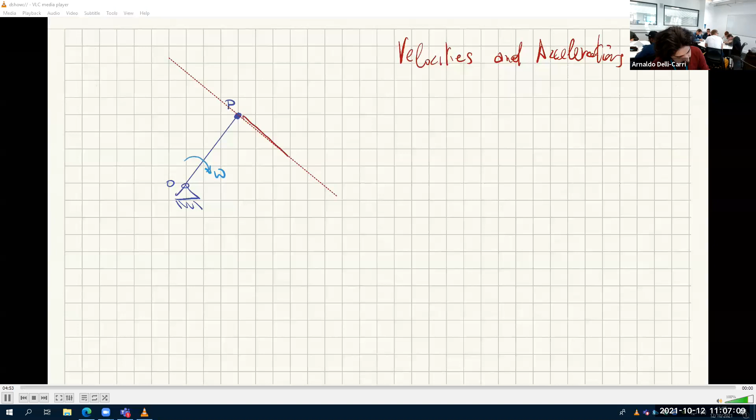So at the next instant of time, let's say this time here, I'm expecting that P has moved along this arc of circle. All right, so now the instantaneous velocity of P is tangent to the circle. The circle is the trajectory that point will take. The velocity is always tangent to the trajectory.

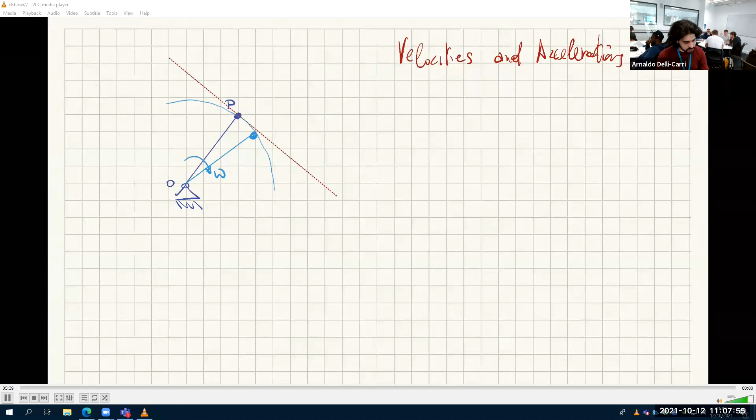Why? Because ideally what you have to do is, remember, this is the position vector RPO at this instant of time. This is the position vector RP prime O, where this is P prime, at the next instant of time. We don't know when, we say next instant of time.

So what is the velocity? What is the definition of velocity? Displacement by time, displacement in time. So what do you mean, the displacement in time? How much displacement and how much time? Well, the displacement is d theta times r.

So what you want to say is that the velocity is basically the difference between the two positions. Final position minus initial position divided by the time interval. These are vectors, so let's call these vectors, divided by the time interval, delta t.

Agreed? Now, what happens? Well, let's say that this delta t is just a number, so it's a scalar. It will not affect the direction of the vector, it will just make it longer or shorter. Agreed? So if we look at this difference, how do you take this vector minus this vector?

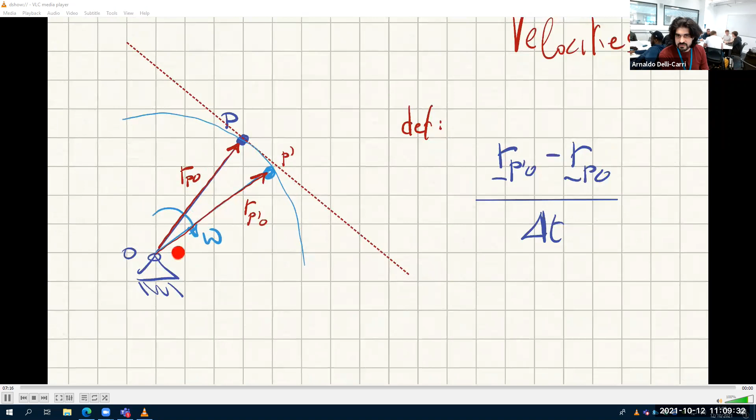This minus this, you have two vectors. So the difference between two vectors is this. Do you agree with me? This is the velocity. This thing is RP prime O minus RPO. Why? Because if I do RPO plus this, it gets me RP prime O. So this plus this gives me this, so this minus this is this.

Agreed? Guys, raise your hand now if you don't understand, because this is fundamental.

Okay, what happens now? This is an average velocity over this interval of time. That's the idea. What we want is to find the instantaneous velocity. Instantaneous velocity means when this delta t tends to 0. So if we take this over the limit for delta t going to 0, what do we get?

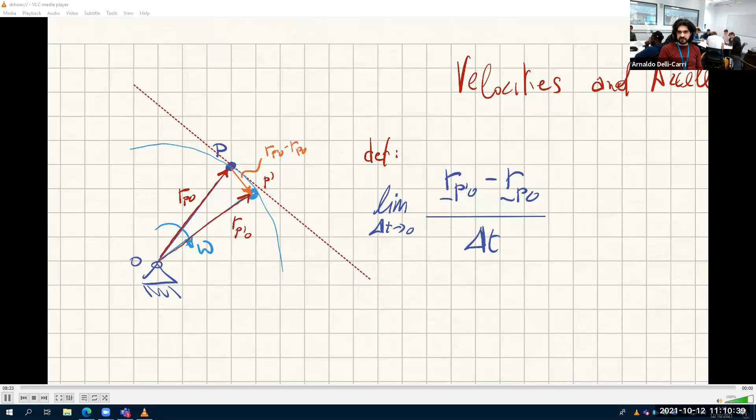Well, this is exactly the definition of derivative, agreed? This is dr over dt. That's the idea, and this is the derivative of a vector, dr in dt, and this is v, which we can also say, if you look at this, this is d theta.

So we can say that this arc here, this tiny thing, well first of all, when we make delta t equal to 0, that means we are using a closer and closer vector. We are going narrower and narrower until we reach the point where this vector here becomes this vector here, which is tangent, as I was saying.

This one is the actual velocity of P. So you see, if you take a finite interval of time, it's not tangent, it's slightly off. So it's tangent only if you take the derivative, which is the instantaneous velocity. That's what we are talking about.

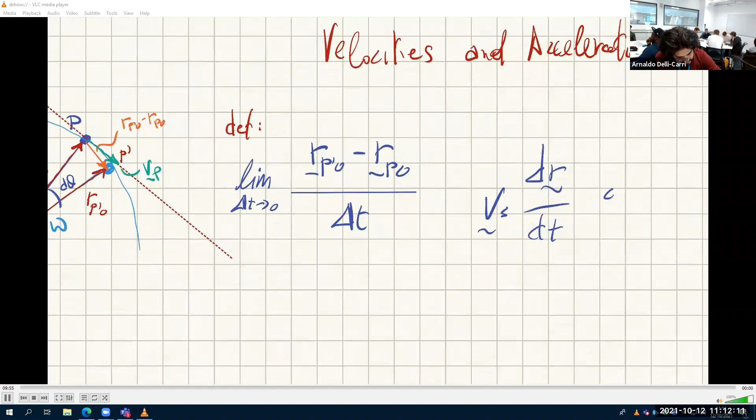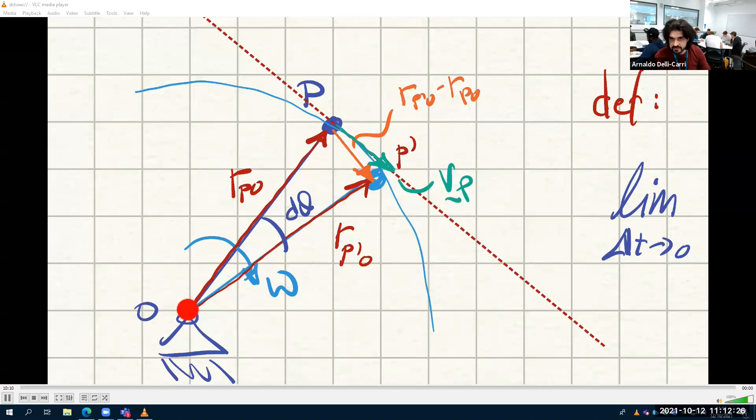And this, geometrically, this thing is just d theta times r divided by dt. Do you agree with me? Because this is d theta, so this arc here is d theta times r. Agreed? So d theta times r divided by dt.

And that means this is also equal to omega r. Because remember, what is omega? Omega is just d theta in dt. So I call this omega, and so I get that the velocity of point P is omega cross r. Why do I use a cross?

What is the cross product of two vectors? It's another vector—a third vector that is perpendicular to both vectors and has direction given by your right-hand rule.

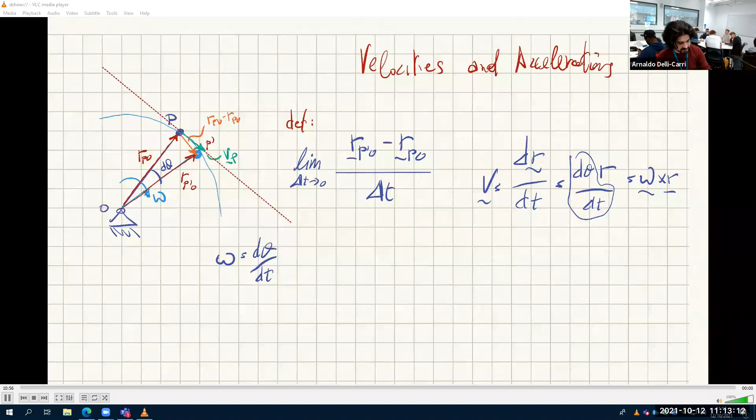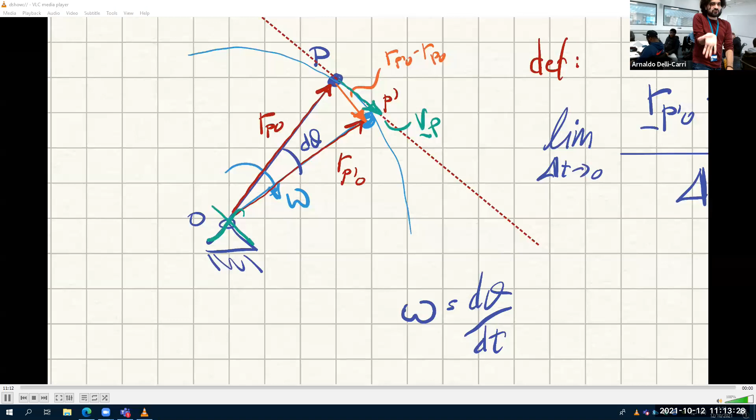So if I take omega, which is this vector here that goes inside the paper, omega is a vector that goes inside the screen as I've drawn it. Omega goes inside, and then I have to place my hand like this. You have omega inside, and then you have to put it onto r. Put inside onto r, and you get this. And this is exactly the velocity of P.

Agreed? Let me do this on the screen as well. I'm going to remove myself from the camera for a little bit to show the same thing. So what you have is that omega is inside, cross r gives me this, and this is exactly VP. That's how you do it. I'm back.

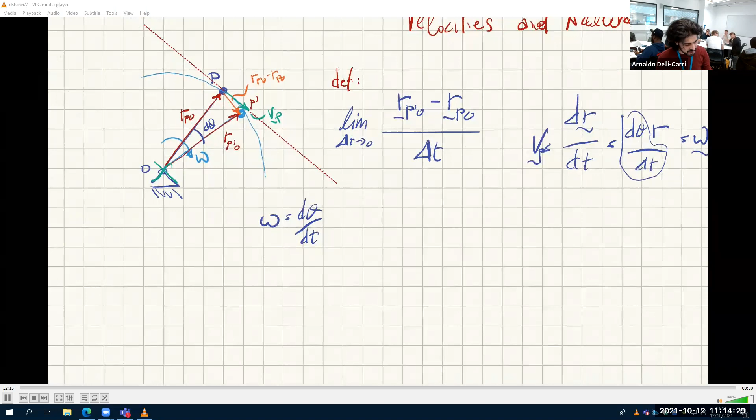Okay, so now that we know these things, we found everything. This is the velocity of P with respect to a fixed point O. Agreed? What happens if O is moving? Well, if O is moving, we have to add the velocity of O to whatever is the velocity of P with respect to O. Because if O is going somewhere, P is following along the link and it's rotating around it.

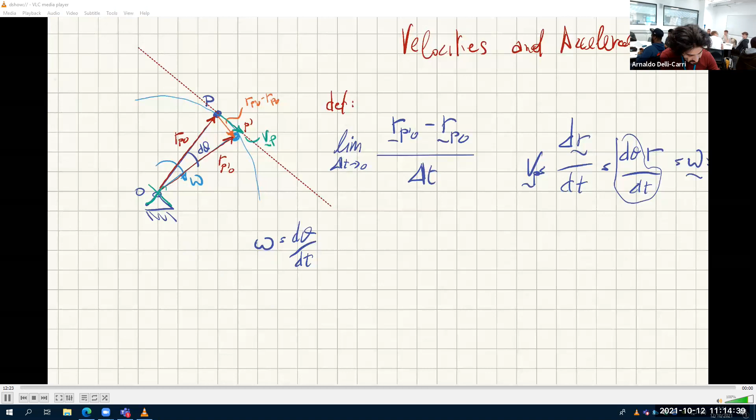So the velocity of P—guys, this is the formula that you need. The velocity of any point is equal to the velocity of a reference point plus omega cross vector r PO. This is what you have to remember. This is the holy grail of the velocity diagrams. Use this every time to get all the velocity diagrams in your life, just with this simple formula.

Can you please repeat that red equation? So this red equation here is: the velocity of P is the velocity of O, so whatever O is doing, plus whatever P is doing around O. Imagine this here, we also call it VPO, which is the velocity of P with respect to O. And so we can also say that VPO is VP minus VO, because this is exactly the definition of relative velocity.

Remember what was relative velocity? It's the velocity of a point minus the velocity of a reference point. That's what it is. And so what I'm saying here is that the absolute velocity of P is equal to the velocity of a reference point plus the velocity of P with respect to that reference point.

Now, if the reference point is fixed, this is 0, and then we go back here. What I'm saying is that P is this point here on the link, and O is the fixed point on the link, or reference point. This is all you need.

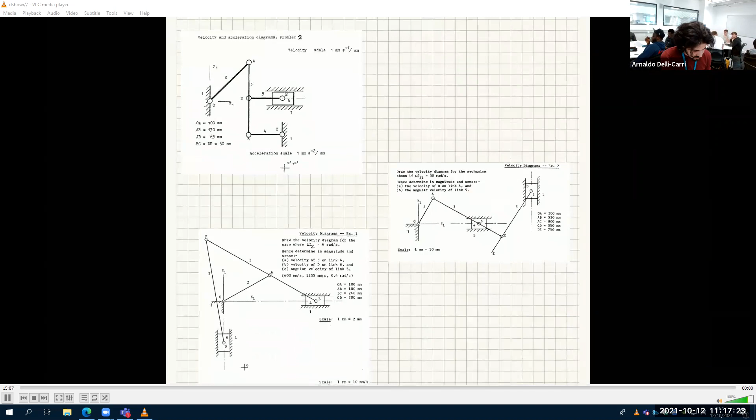Okay, so let's solve this one. Let's solve which one? This one. I'm not sure which one—we have 4, but let's solve this one because for the first one, we don't do the velocity or acceleration diagrams afterwards. I want to solve this one because we also do the acceleration diagram later. And then I'm going to solve this, and if there's time, I'll solve this one first—this one and this one.

Okay, let's start. This is a mechanism of which we know complete geometric information. We know the geometry of this thing, although it doesn't look like it's to scale. So this is 100 millimeters, however much this is, and you can find the length of all these. So you have complete geometric information. You can't find the velocity diagram's actual values if you don't have complete geometric information—you can see the shape, but you can't find the actual values.

We also have that point O and point D are fixed to the ground, and this structure is pinned onto them. So body 1 is the ground, as we love to say—1 is always the ground. Body 2 is this OA, link OA. Then body 3 is, of course, this entire triangle—say it's a plate.

And then we have link 4, which is link BD. All right? Does it make sense?

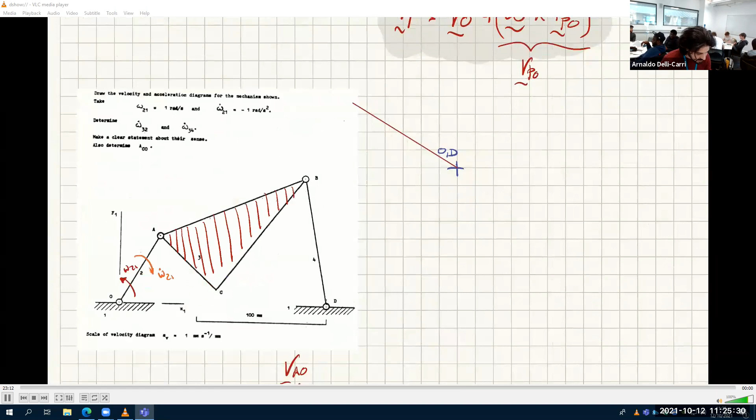Let's say that this is 100 millimeters. This looks like 80, something like this. Yeah, looks like 80, more or less. How do you measure this material? You measure it, because it's to scale. Now, I'm not measuring it, but I'm saying that this is 80 millimeters.

So if this is 80, this vector here, this is 1 radian per second, this is 80 millimeters, and so the velocity of A is just equal to 80 millimeters per second. Agreed? Which direction? Perpendicular to both this and this, so that means it's in this direction. Now you draw an 80 millimeter long vector. Let's say the scale factor is 1 millimeter is 1 millimeter per second, so you draw an 80 millimeter vector in this direction, and you say that this is VA.

VAO. And so if this is VA, this is point A. I'm calling this VA because VAO is also equal to VA, because O is fixed.

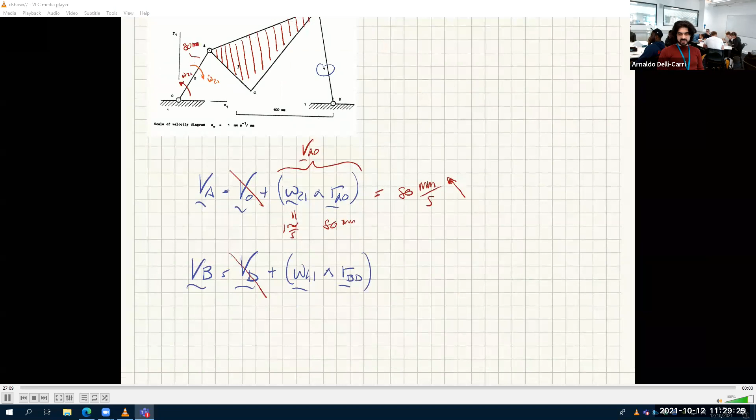Now, what do we know about VD? Well, VD is fixed, VD is 0, because we start from here, this is D. So this is a very good choice of reference. And what else do we know? Do we know RBD? Yes, RBD is given, well, let's say this is 100 millimeters because I measured it. So we know that this is 100 millimeters.

Do we know omega 41? No, we don't. So are we stuck? No, we can just create an infinite line and draw it. So the only thing that we don't know is the length, what we do know is its direction. We don't know how long the vector is, but we know it must be perpendicular to this one and this one.

Now, this one, it's either pointing out of the paper or into the paper, so we don't care, because that means the resulting vector is in the paper. So this only tells us the resulting vector is inside the plane, so we can draw it, we don't need a 3D thing. The important information here is that this thing is perpendicular to RBD, and that's the only thing we know. We know it's perpendicular, and that's it.

So we start from D, because this is our reference point, so we start from this point here. And we say that, let me also remove all these things. We start from D, and we say that, okay, let's take this as my perpendicular vector, let's make it as perpendicular as we can. So this is the direction.

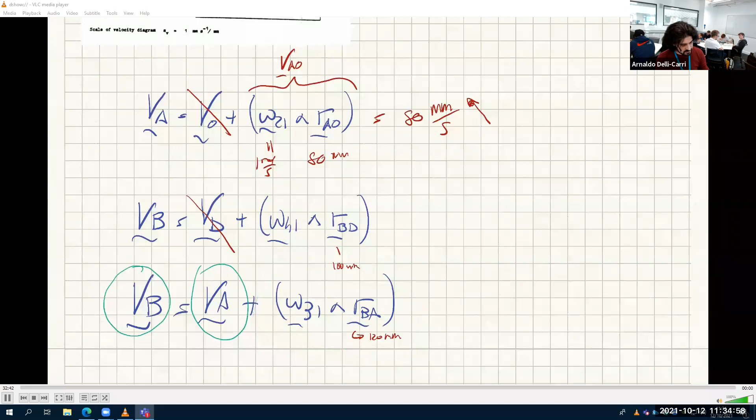Let me show you. So first of all, let me call this B line with respect to A, because VB is VA plus this vector here. And so VB is VA plus this vector here. See what I'm doing? And VB, so the same vector, is also VD plus this vector here. So VD is 0 plus this vector here. Okay? See what I'm going?

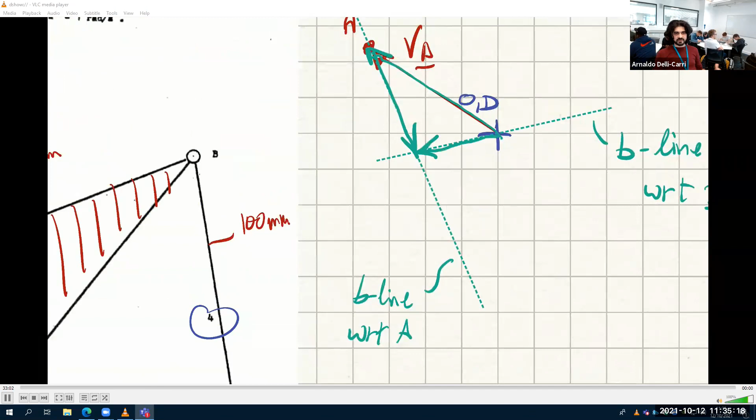I'm going to B. This point must be B. And so I can say that this vector here, I call VBA, velocity of B with respect to A. And this vector here, I call it velocity of B, which is also the velocity of B with respect to D. You agree with me? Because VD is 0, so VB is VBD.

Can you show you got the B line with respect to D again? Of course.

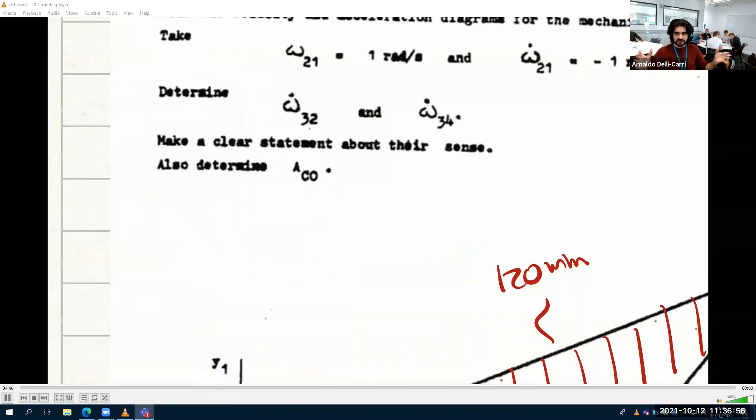Why omega 3.1 and not omega 3.2? So first of all, omega 3.1 means how the body, this plate 3, is moving, is rotating in plane with respect to the ground. So it's the absolute angular velocity of 3, so it's always 3.1. You also call it just omega 3. Everything that has a 1 attached at the end means absolute. It's just a way to make sure that we are on the same page, because, see, omega 3.2 is omega 3 minus omega 2, exactly as VBA is VB minus VA. All right? Omega 3.1 is omega 3 minus omega 1, but omega 1 is always 0 because it's fixed. It's the omega of the ground. So that's what it is.

Okay, so this looks horrible because it's tiny. You can make a much better job than me, okay? And also to scale. But yeah, so that's it.

We found VA, VB. Do we need C? Yeah, let's do C. I mean, I don't think we need C, because once you know what A is doing and B is doing, well, C is very easy. But again, for the sake of completeness, let's find VC.

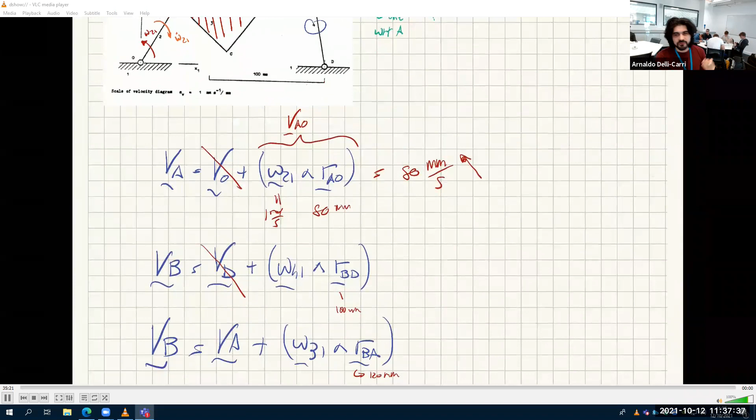How do you find VC? You choose a reference point. Which reference point? Well, we now know VA and VB. VA is the absolute velocity of A, VB is the absolute velocity of B. And both points are also connected to C.

So I take the first equation with respect to B and the second equation with respect to A, and I find what's happening to C. So I find a C line with respect to A, a C line with respect to B, where they intersect, that's point C.

And then we check. So I'll go here and say VC is VA plus which omega? Which omega? Omega what? 3.1, because we are still on body 3. Okay.

So what is this? Well, this is VA, so that means I start from VA and I draw a line, this line, so this is V, let me call this with this name. This one is also called VBD, V of B with respect to D. This one is also called VBA. So this one is called VCA.

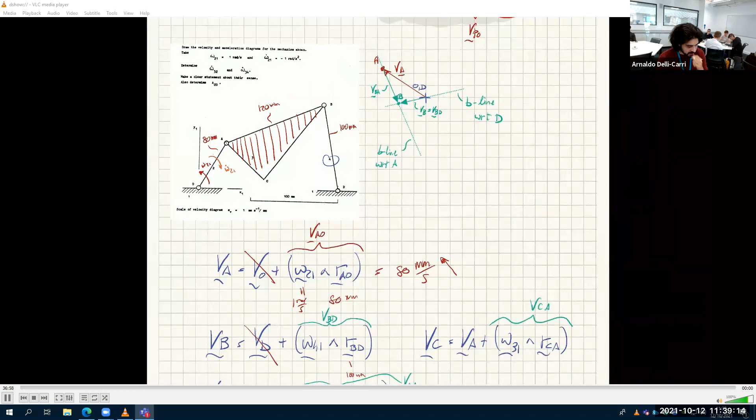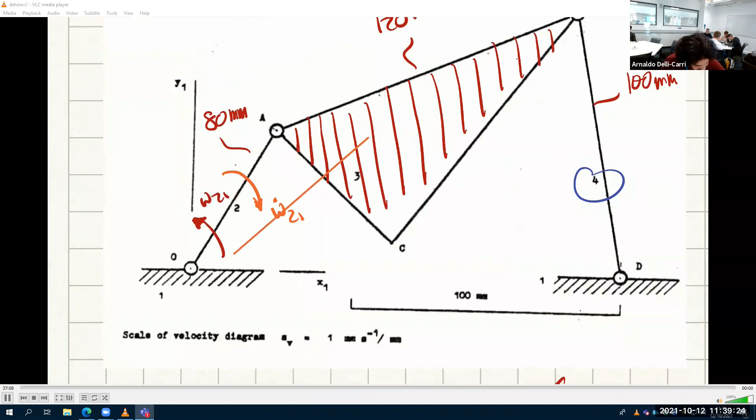So velocity of C with respect to A. That means I must start from A, I start drawing it from VA. So I start from VA, and let's do it this orange now. And I draw a line that is perpendicular to CA. Perpendicular to CA is this one, as perpendicular as I can make it. And I must attach it to here, to A, point A. And this is my C line with respect to A.

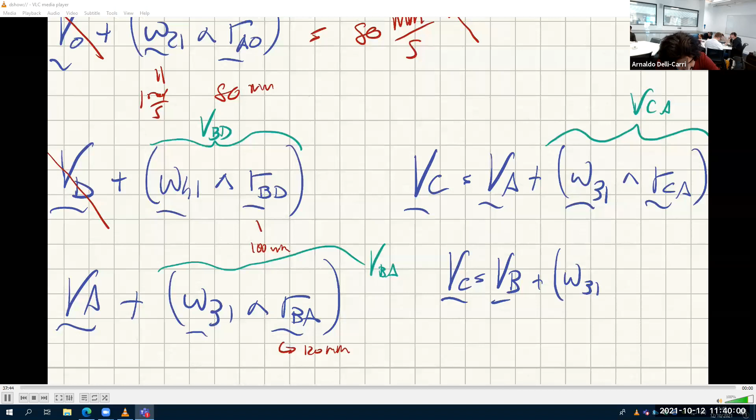Now I do a line with respect to B, but I have to draw the other equation first. VC is also equal to VB plus still omega 3.1, because that's the same body. They are on RCB. And so this is also called VCB.

And we know that this vector here is perpendicular to RCB. So RCB is this, so perpendicular to this is this vector, this direction here, as perpendicular as I can make it, must pass through B, because I start from B. This is VCB, VC with respect to B. So I start from B, and this is my C line.

With respect to B. And where do they intersect? The C line is called the C line because C must lie on that line. But we have two C lines, so C must lie at the same time on both lines. So that means it can only lie here. So this is point C. And so that means that this vector is VCA, this one. This one is VCA. This one, see, that's getting very messy, sorry. This one is VCB.

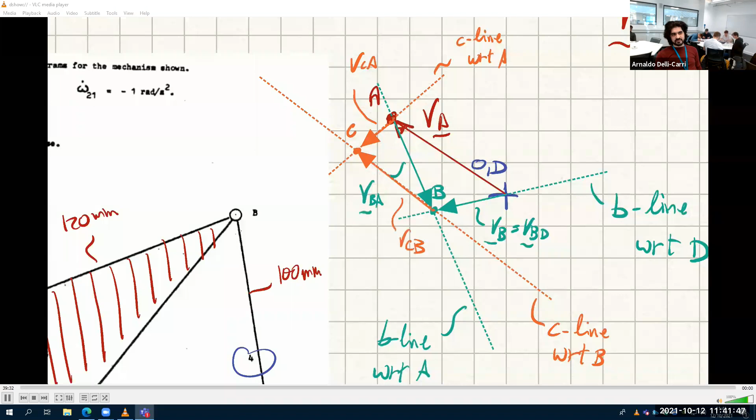But the vector itself, I have not drawn yet. The vector I need is this one. Agreed? Because that's the sum, that's the sum of those two. So this one is VC. Okay, I mean, it's horrible, I give you that, but we can make it larger. I can just scale it up very easily. Still looks horrible, but larger.

Good? Any questions? No? I mean, it's not hard. It's just always the same thing, literally always the same thing. You just have to make sure what's going on and how you solve these things.

Sir, yes? How do you find the directions? The direction comes from here. See, it's always perpendicular to—this means in plane, means in the paper, and perpendicular to this. So this is what gives you the direction. Once you know BC, is this, you know that VCB is just perpendicular to this. Okay, so VCA is perpendicular to AC, and that's so on and so forth. They're always perpendicular because that's how the definition works.

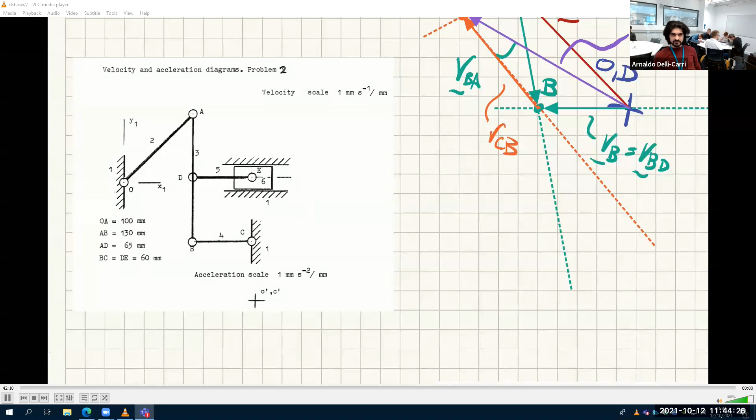All right, you don't have any questions, but I want to show you, before I give you a well-deserved break, how do you treat these kind of problems. Because look at this, here we have a sleeve, say, and a piston in a sleeve. So how do you do about that? So let's do the velocity diagram of this other thing.

So you can do these by yourselves, because then we have to do the acceleration diagrams now. So let's do the acceleration diagram of this. We take this down.

We have all the information here, okay? These are all given. So now this is much better. And we want to find what happens to 2, 3, 4, and 5, and A, B, C, D, E.

One thing I didn't tell you is now that we have these vectors, we can find all the omegas. You remember the omegas were all unknown. Now that we have VCB, we know that VCB is omega 3 times RCB. This we can measure here. This we have measured earlier, so we can find omega 3,1.

So you can say that omega 3,1 is VCB divided by RCB. Agreed? And omega 4,1 is here, look. So it's VBD divided by RBD. And of course, I'm saying these because these are the magnitudes of these two vectors. The magnitude of VBD divided by the magnitude of RBD.

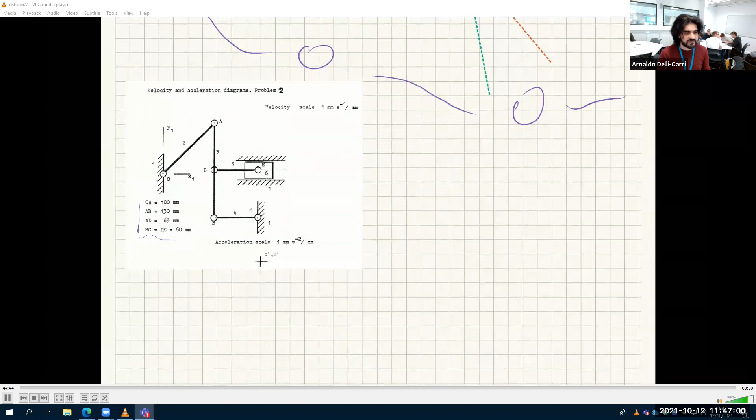Okay, let's do this very briefly. So what is the velocity of A? Let's say that omega 2,1 is given. I don't know which one is given here, but let's say omega 2,1 is given, and let's say it's going in this direction. So what's the velocity of A?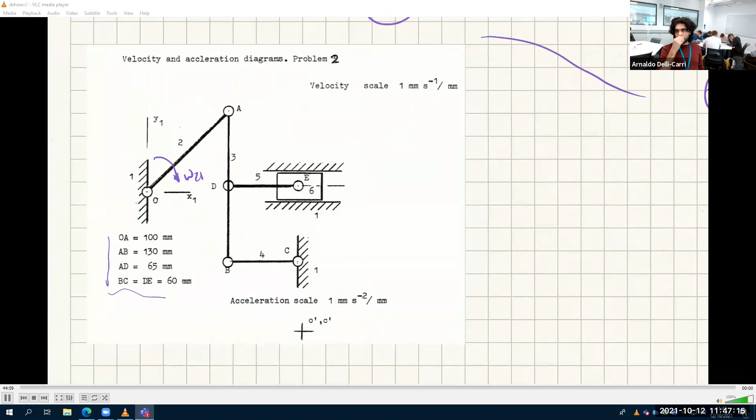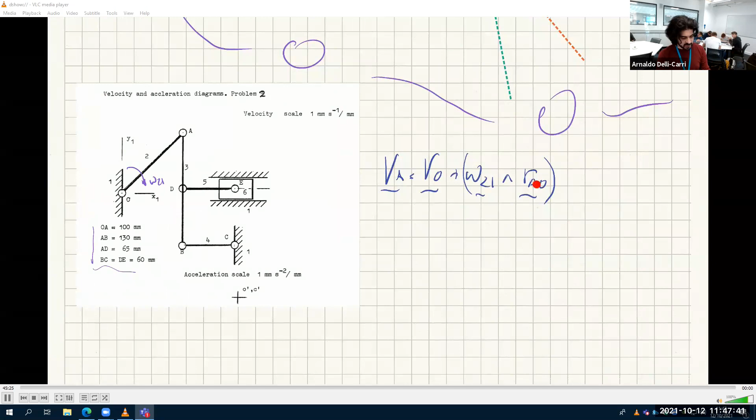The velocity of A is the velocity of O plus omega 2,1 vector RAO. Always this. Always, always, always this. Velocity of O is 0. And that means the velocity of A must be perpendicular to AO. So that means it's in this direction. Okay, this is VAO, which is also VA.

How long is it? I don't know. So let's find out, because we know that omega 2,1, let's say, is 1 radian per second, and RAO is 100 millimeters. It says here, but this is 100 millimeters, so the velocity is 100 millimeters per second. Agreed? So we can draw a vector that is 100 millimeters long. This is 10 centimeters, probably too large, so I would use a different scale factor. And it's in this direction.

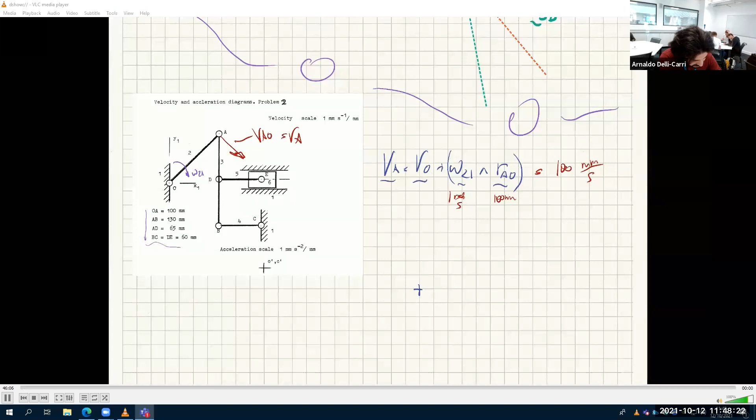So let's say I'll start from this point. And this point is O and C, because O is fixed and C is fixed. And then I draw this one, which I'm saying is perpendicular to this. And this is point A, and this is VAO, which is also VA. All right, that's it. Very easy.

Let me check the chat. Yeah, Ravi, it's given. It's given. It should be given. You need at least one velocity, otherwise you can't solve it. This is a mechanism. Mechanisms are 1 degree of freedom. 1 degree of freedom means that when you set a velocity, you know every other velocity. When you set a coordinate, you know all the other coordinates. Okay, I'm saying omega 2,1 is equal to 1. It doesn't say so, but probably because I just cut out. That's at the top, right? Velocity. No, that's the velocity scale, the velocity scale diagram. It's the suggested scale for the velocity diagram. Okay, so yeah, unfortunately, we don't know that, but it doesn't matter.

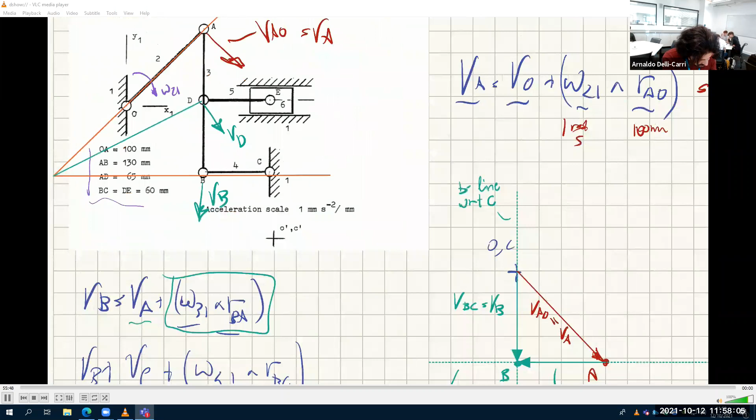Okay, so let's find VD. Again, we said that VA and VB are not useful, but what we can say is that VD will be half as much as VB. It must be. So let me get rid of these, otherwise it's confusing. So we know that VD must be half as much as VB.

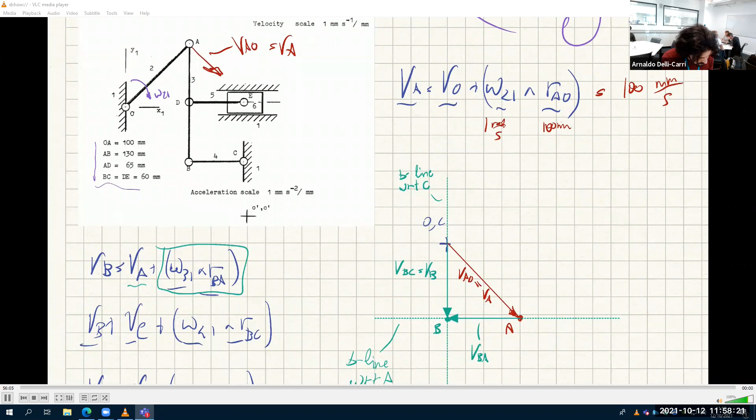We use A and B, but we can also use A and C. We see, sorry—no, we can't use VC because otherwise we don't have one of these.

Okay, so we just have to say that since VAB is this, VBA is this, that means VDA is half of this. VBA is this—imagine that this is the point of rotation of A. B moves in this direction with respect to A only, and that means D must move in this direction because they must lie on the same line. So if VB is 10, VD is 5, because it's halfway through. It's linear, that's the idea.

So what we want to do is take VBA and say that D lies here. Sorry, VDA is this point here—this vector, exactly half as much, is VDA. And so how much is VD? Well, VD is just VDA plus... so this is VDA.

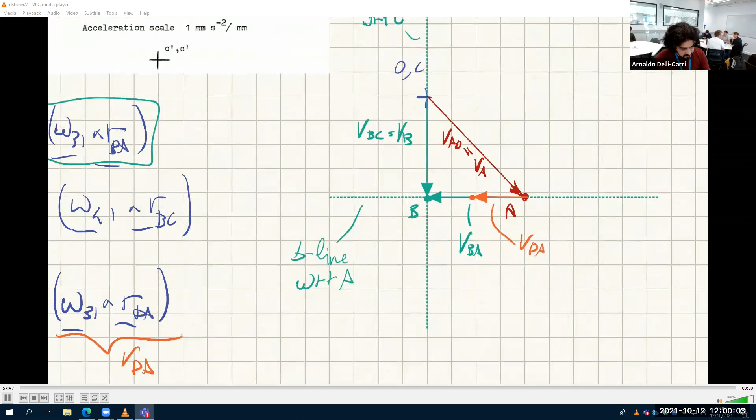So VD is VA plus VDA, and that means VD is this vector. This is getting messier, of course. There you go, this one is VD, which is VA plus VDA. Now that we found VD, this point is D. Let me get rid of this and put it here. This point is also point D.

We can now go and find E. E is, of course, horizontal. That's one thing we know for sure: E must lie on this line with respect to O. With respect to O means with respect to the fixed point, the ground—this E moves horizontally. So this is the E line with respect to O, which is with respect to the ground.

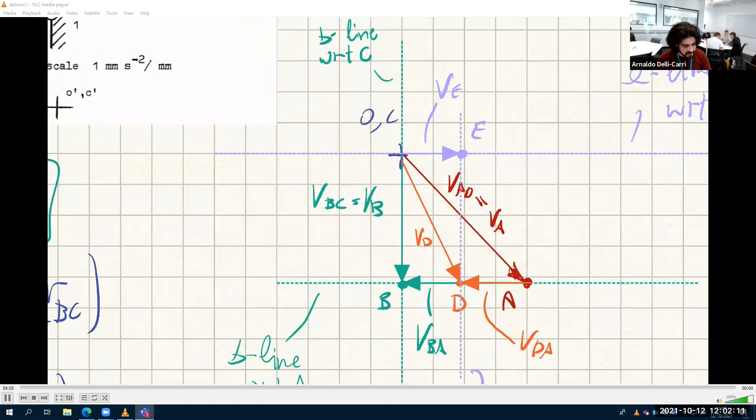We know that given VD, D and E relate by the equation VE is VD plus omega 5,1 vector RED. That means this is perpendicular to RED, so I start from D and draw a perpendicular line, which is a vertical line passing through D. And this is also the E line, but with respect to D. That means point E is this one, and this is VE. This one here, which I won't draw, is VED.

That's it. It might be a lot to take in, but it's always easy unless 3 points are aligned, because then the reference system points doesn't really work, and you have to understand the ratio. If they're aligned with this exactly in the middle, whatever velocity you have here, half as much you have there. But if this was say 2/3 of the way, then this would be 2/3 of the speed. It's just a very particular case. I don't think it will come up at the exam, because we tend to make exams solvable in an easy way. Don't be scared though—when 3 points are aligned, it's always like that, it can't be any different.

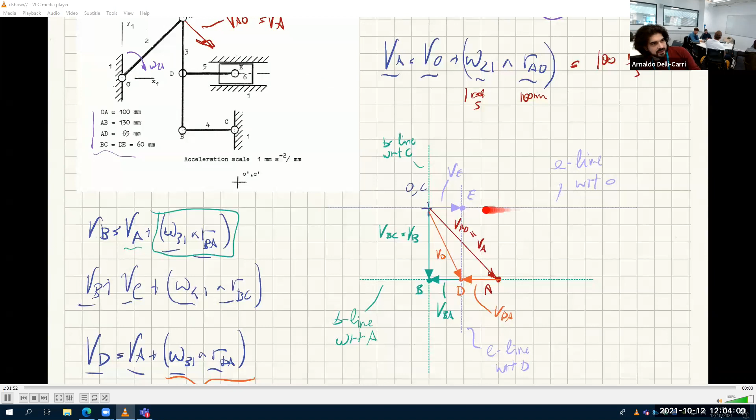So how do we find VE? Well, we know that point E, with respect to the ground, can only go horizontally, because it's constrained to move horizontally. So with respect to O, which is the ground because it doesn't move, this is a horizontal line. Then with respect to D, VE can also be written as an equation: VE equals VD, so I start from this point, because this is point D, plus this vector here, which is exactly a vector perpendicular to ED. Perpendicular to ED means vertical. So the vertical line passing through D intersects the horizontal line passing through O, and this is point E.

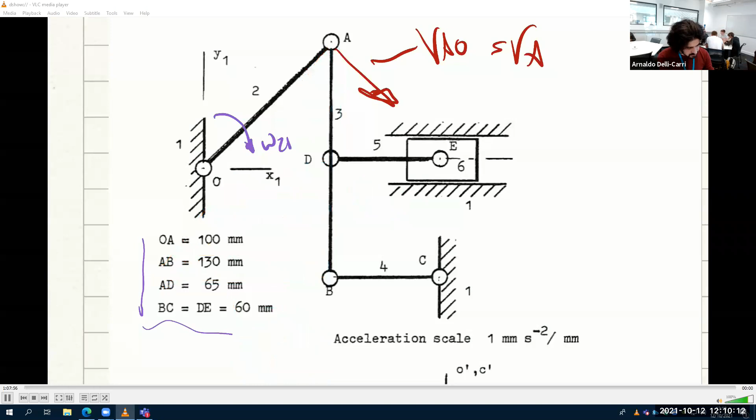And this one here, which is VDA, since this is 130 and this is 65, that means VDA is half as much as VBA. Agreed? And so that also means I can go here and say that on VBA, VDA is just the same vector, but scaled down by a half.

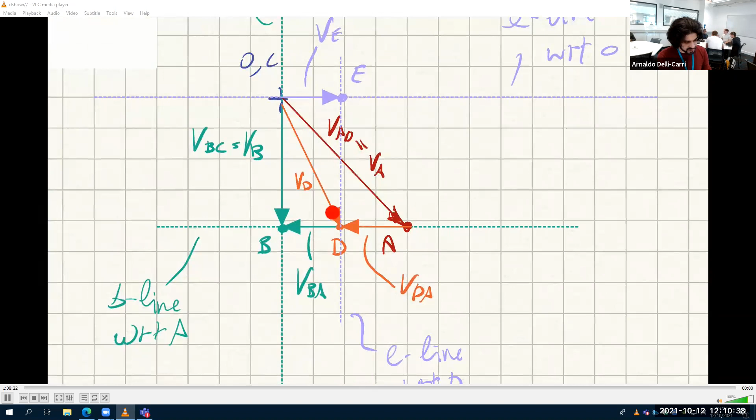And so that means now if I look at the equation, VD is VA plus VDA. So VD, this vector here, is equal to this vector plus this vector. So I find VD. Okay? Let me check the chart. Is this clear?

Why does VD start from O and C? Because VD is the absolute velocity of point D with respect to the ground. The grounded points are O and C, these are ground. So everything that starts from here is an absolute velocity. In fact, you have VB going from O to B, you get VB. From O to A, you get VA. From O to D, you get VD.

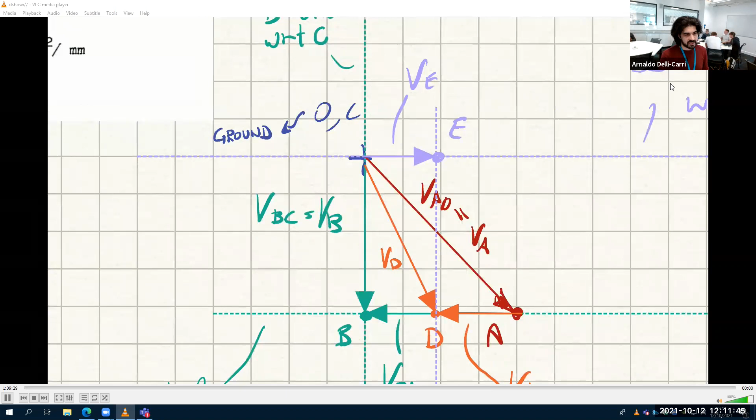It's the zero point because they are both fixed. O and C are both points that are fixed to 1, fixed to the ground. Is this clear?

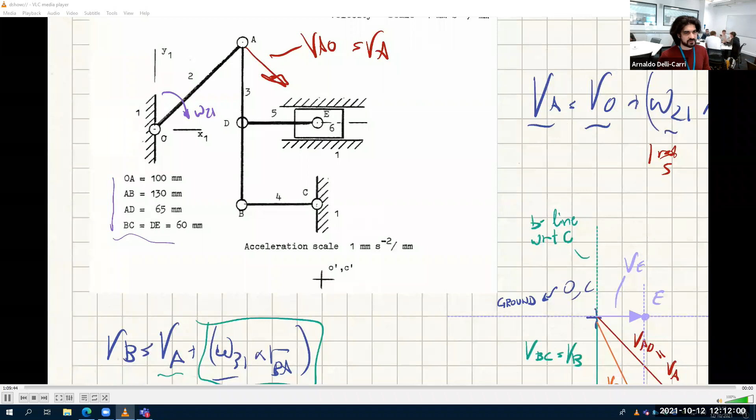What do you mean by omega 21? I just said it's 1. No, this should be given.

What do you mean it's not parallel? Not parallel to what? What is not parallel? Which vector is not parallel to the picture?

VD, but it must not be parallel. VA is this, VD is more inclined, and VB is vertical. So this is VA, this is VD, this is VB. So if I draw this link at the next instant of time, okay. Agreed?

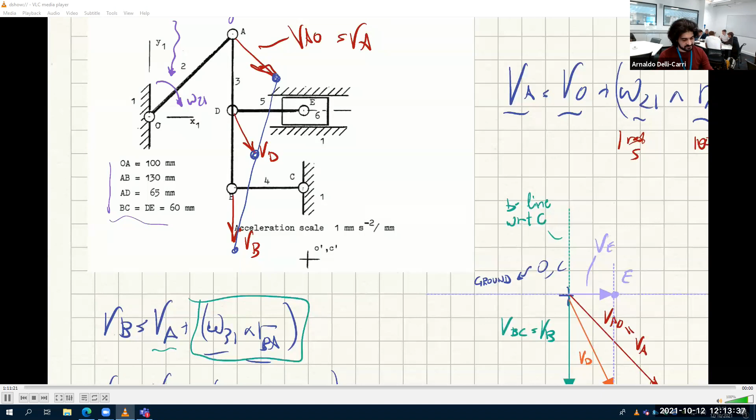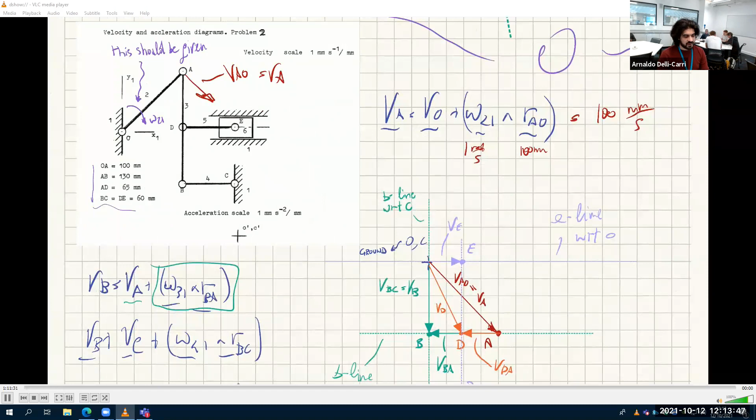Okay, let's resume very briefly. Let's do accelerations.

How do we find the acceleration? What is acceleration? It's the derivative of the velocity. Agreed? So let's remember what was the velocity: velocity of P is the velocity of O plus omega vector RPO.

Okay, looks easy enough. So if I take the derivative of VP, the acceleration of P is equal to the derivative of the velocity of P with respect to time. And so this means the derivative of the velocity of O with respect to time, plus the derivative of this, with respect to time. Okay, agreed?

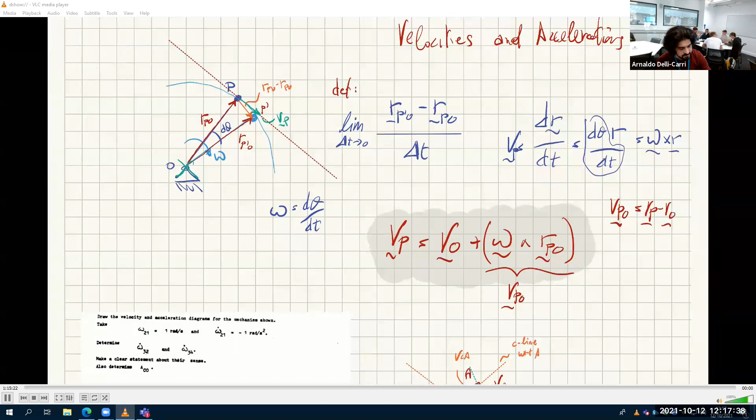Zero? Why zero? No, it's R, that's the velocity of P. Oh, that's the derivative of the displacement, RPO. RPO is the position vector, the derivative of the position is the speed. Agreed? So remember RPO, we did this all the way back, the derivative of R in t is omega times R. So if you look here, this is also omega times R.

And lo and behold, this is the final formula. As you can see, we don't have 2 terms now, we have 3 terms for acceleration. 3 terms.

How do we make sense of what's going on here? Well, here, this is easy. Let's rewrite this in this way. Acceleration of P equals acceleration of O plus this term first, omega cross omega cross RPO, plus omega dot cross RPO.

Now this term is what we call tangential acceleration, acceleration tangential P. And this one is what we call normal acceleration or centripetal acceleration, acceleration normal P.

How do I know that these are tangential and normal? Well, let's look at their direction. We know that this is a cross product between a vector that is perpendicular to the board, and that means the resulting vector ATP is a vector inside the plane, and it's also perpendicular to RPO. So perpendicular to RPO means that AT is this.

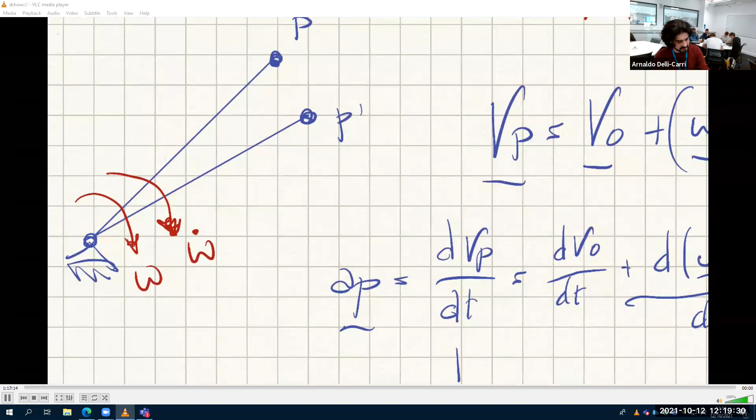Let me get rid of this. AT of P is this vector. It must be perpendicular to PO. Agreed? This is PO. It must be perpendicular.

And it follows, it doesn't follow omega, it follows omega dot. So if omega dot is in this direction, then ATP is in this direction. If omega dot was in the other direction, ATP would be in this direction. So the ruling factor, the king here is omega dot in this term: angular acceleration, radians per second squared.

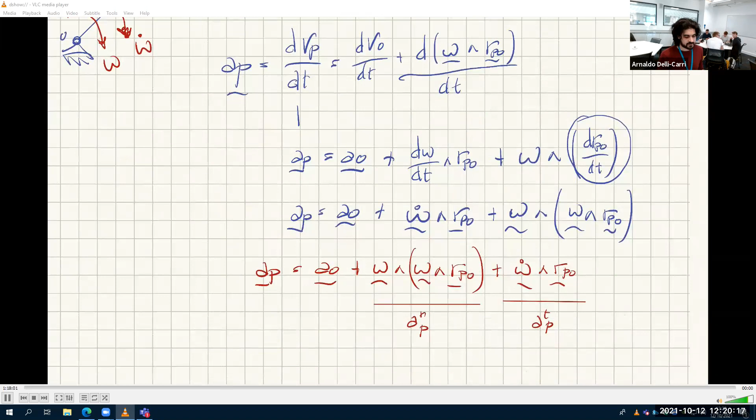What about this? What's the direction of this? Well, this is a double cross product. That means perpendicular to the perpendicular. What is perpendicular to the perpendicular? It's just parallel with extra steps. Okay, that's what it is.

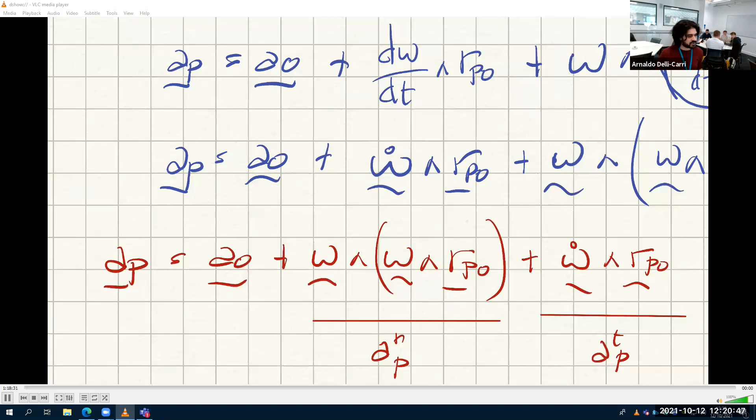It's parallel, but it's not as parallel. Well, it is parallel, of course, the same direction, but it's in the opposite direction. Why? Because let's have a look. These are my two vectors. This is my original RPO.

The first cross product gives me this, and the second cross product gives me this. So perpendicular, perpendicular again. So it's parallel, but in the opposite direction. Agreed? Very important. So it's not in the same direction as RPO, it's in the opposite direction. It's ROP.

And that means that it's called centripetal acceleration because it's in this direction. Agreed? So it doesn't go that way, because it goes the other way. Acceleration normal P. Okay, that's it.

That's it. What is the acceleration of P? It's the sum of these two. Well, of these three, because if you also have an acceleration of O, you must also sum the acceleration of O. So the acceleration of P with respect to O is this one, this one, APO. Agreed? Just two components of the same vector.

Let's call this APO. So AP is just AO plus APO. It's the same thing. The relative acceleration is AP minus AO. That's what I'm saying. But AP minus AO has a full story inside it.

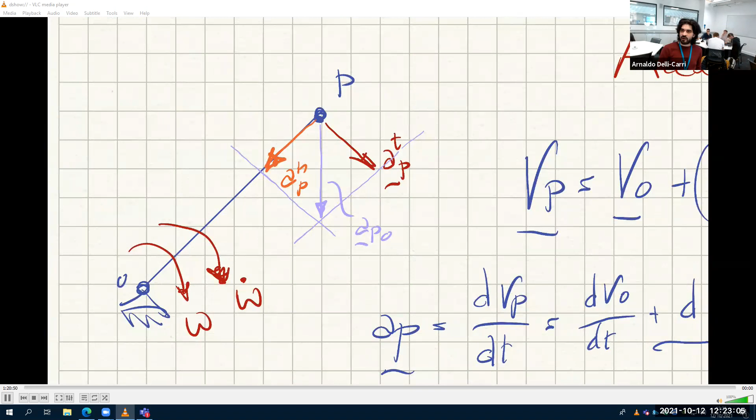What happens if you're going at constant angular speed? That means you have no angular acceleration. What happens if you have no angular acceleration? This thing that depends on omega dot disappears. So the acceleration of P is just the normal acceleration of P. This goes away, but this does not go away. This depends on omega, not omega dot. That's why I was saying the velocity diagram is required for the acceleration diagram. Otherwise, you lose all this information here.

Do you remember when we said that in first year, the normal acceleration is omega squared r? So omega squared r, see, there you go. Now you have a vector representation of that thing. In fact, the magnitude of this vector is omega squared r. But now this also encodes the direction. So this is more general, a more general representation.

Remember when we said in first year that the tangential acceleration is alpha r, alpha times r? There you go, that's it. It's here, so it's nothing new. It's something that you have encountered already. This is now a more general form of what you should already know. Right? Good. So let's solve this one again, but now let's look at the acceleration diagram of this.

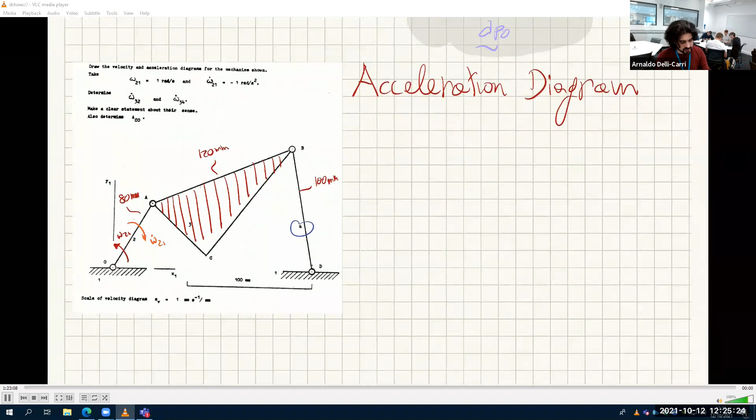So the acceleration diagram is given omega 21 dot. I have omega 21 dot here, and it's opposite in direction of omega 21, so that means it goes in the opposite direction. That means we have full information on what's going on to the acceleration of A. What is the acceleration of A?

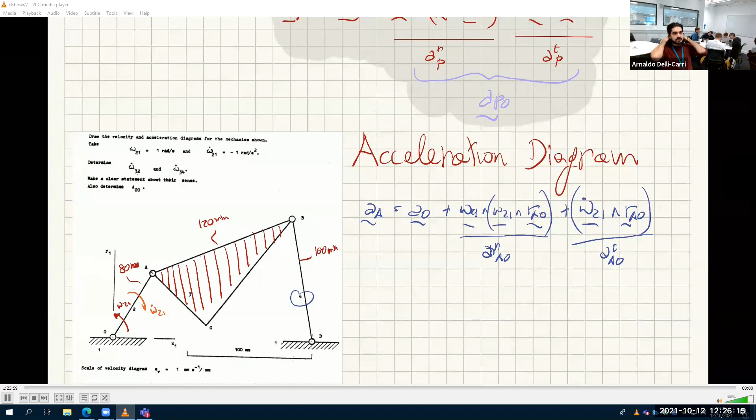Let me write the equation again. Acceleration of A is the acceleration of O plus the centripetal acceleration, which omega? This is omega 21, RAO, plus omega 21 dot, RAO. Agreed? This one is AT AO, this one is AN AO. Altogether, they give you AAO. Again, don't be scared, it's just labels everywhere.

So we remember we found omega 21, omega 21 was a number. So we know how long is this vector, because we have RAO. RAO is 80 millimeters. And so this one is this many millimeters per second squared. And we know omega dot 21, and we know RAO, so this is also this many millimeters per second squared. They're all accelerations, of course. AO is 0.

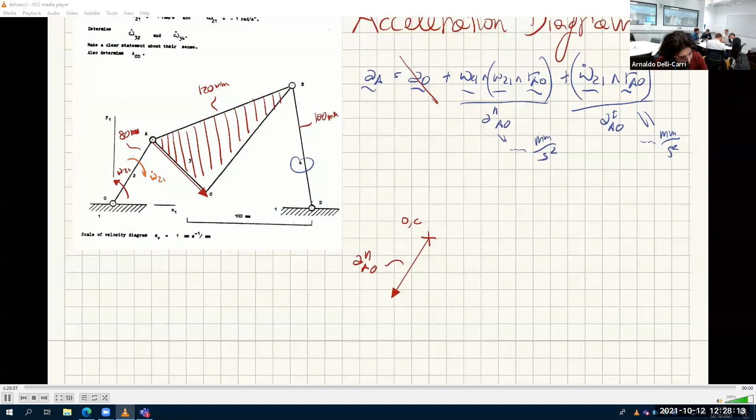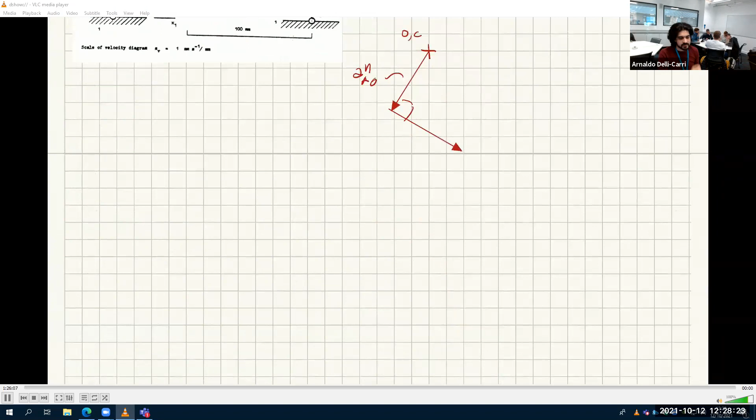So I start from this point, and I say that the acceleration of A is one that goes in this direction. It's the sum of these two, this one plus this. The sum of vectors means one after the other. So first I draw this vector here, and then I draw this one just after it. So this is AN AO, looks like this. And then I must attach a vector here that goes in this direction, AT AO, which of course must be perpendicular to this. So this is 90 degrees, because one is normal, one is tangential. They are like, I don't know how long these are, so I'm not sure if this is the correct thing because we don't have numbers.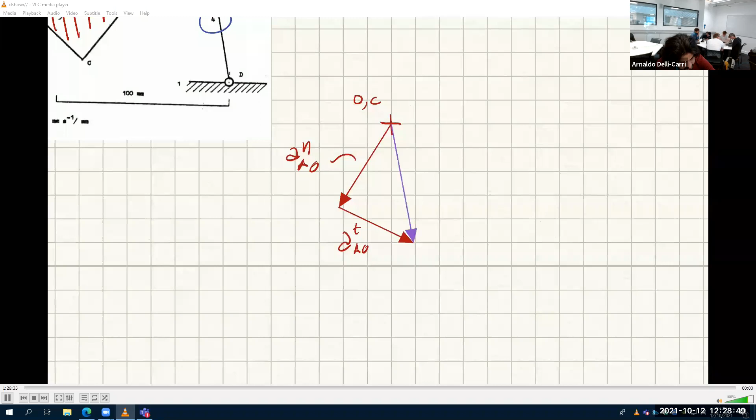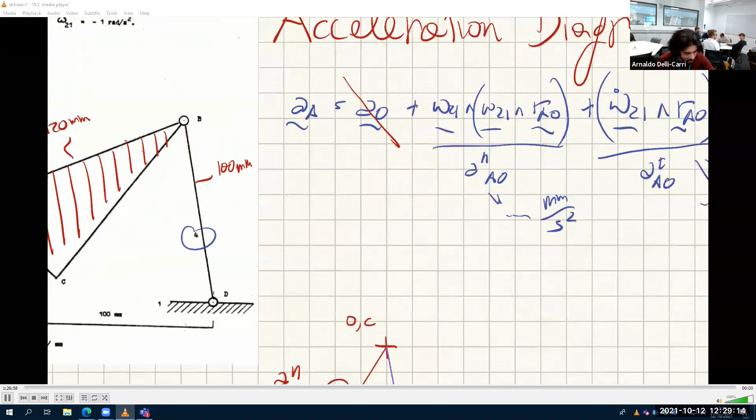But let's say it's this. So this is AT AO. And so I can tell you that this one is AA, this one here is the acceleration of A, because it's the sum of AO, which is 0, plus this, plus this. For the acceleration equation, does that say plus AO plus omega 21 times omega 21? It's omega 21 across omega 21. It's omega 21 all the way, always omega 21.

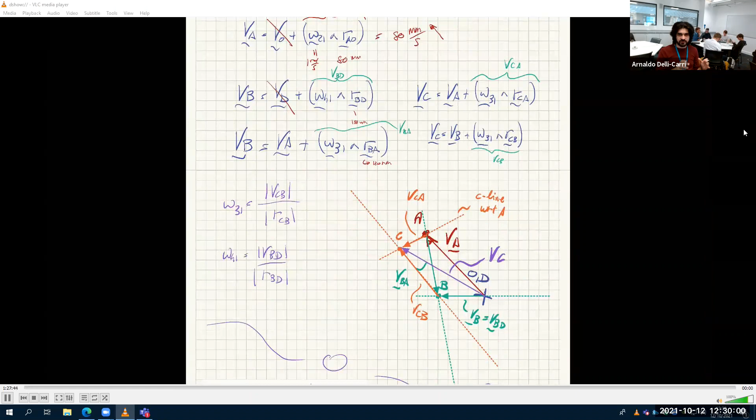Now, this is AA. So how do we find AB? Well, AB, again, we find the B line with respect to A. Now, all the centripetal accelerations are given, always. Could you explain how to find the magnitudes of the acceleration vectors again? It's just, you know this, because we found it earlier. If you look at this, we found that omega 21 was given. Omega 31 you find from here, omega 41 you find from here as well. So the relative velocities give you the omegas, and the relative accelerations will give you the omega dots. That's the idea.

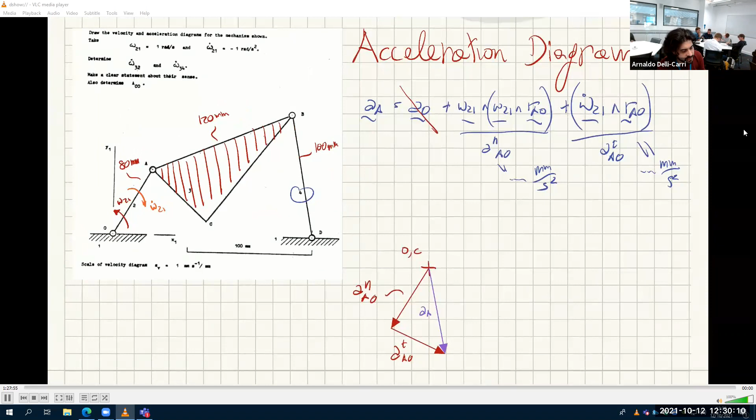So let's do acceleration of B. The acceleration of B is the acceleration of A plus omega. So B and A share omega 3. So omega 31 cross omega 31 cross RBA, plus omega 31 dot cross RBA. What do we know? Well, this one is given, this one we just found, this one we found is this.

So we start from this point, let's call this point A. So let's start from point A, and then we draw another vector here of which we have full information. We know everything because omega 31 we found earlier. And RBA is just a measurement, it's just the distance between B and A. And so this one is also this many millimeters per second squared.

What we don't know is this one, who knows? But we know that must be perpendicular to RBA. So after A, let's draw this one, which is in direction B, so it's in this direction. How do I know? Well, it's in the opposite direction, because it's parallel to RBA, so it's in this direction for sure. But how do I know which direction it's going? Well, since this is the acceleration of B with respect to A, remember, instead of going from A to B, it goes from B to A. It's always in the direction of the reference point. Okay, so it's in this direction.

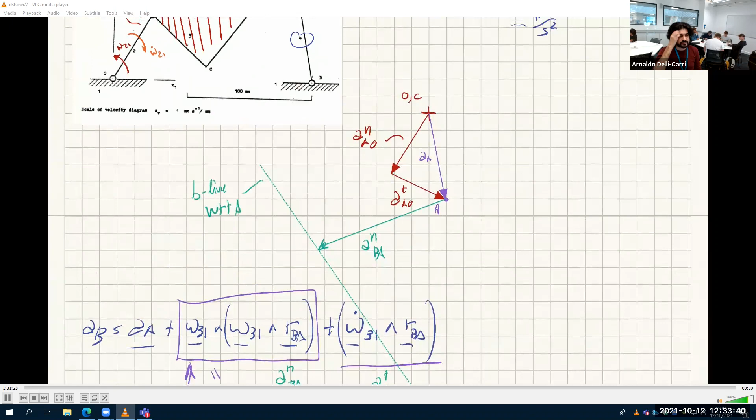Let's find the B line with respect to D. And also, this is not C, this is D.

Let's find the B line with respect to D. Acceleration of B equals acceleration of D plus omega 4(1) cross omega 4(1) cross RdB, plus omega 4(1) dot cross RdB.

What are those symbols? I'm spelling them out as I tell you. This is AB equals AD plus omega 4(1) cross omega 4(1) cross RdB plus omega 4(1) dot cross RdB.

These terms are the centripetal normal acceleration BA, which is this vector here. And this one is ATBA, the tangential acceleration BA, which we don't know, but we know it's perpendicular to RBA.

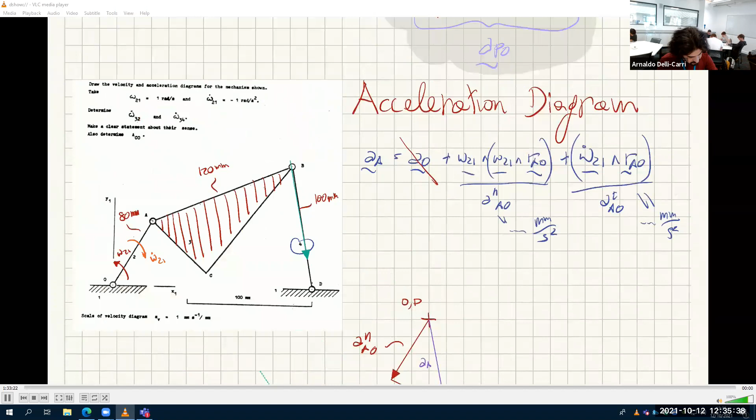There you go, that's very unfortunate. Let's say this is parallel to that link. Let's make it longer.

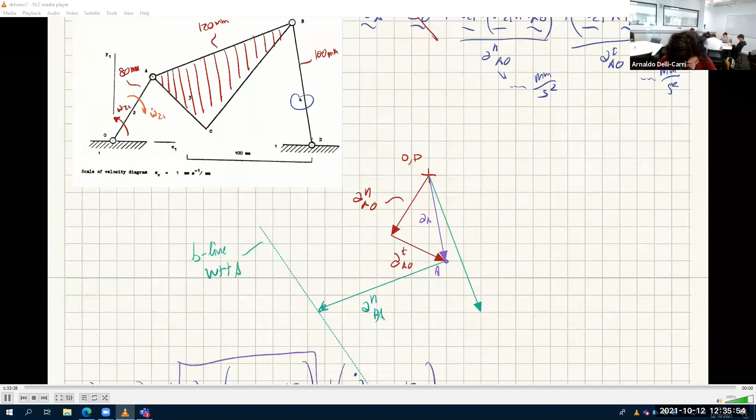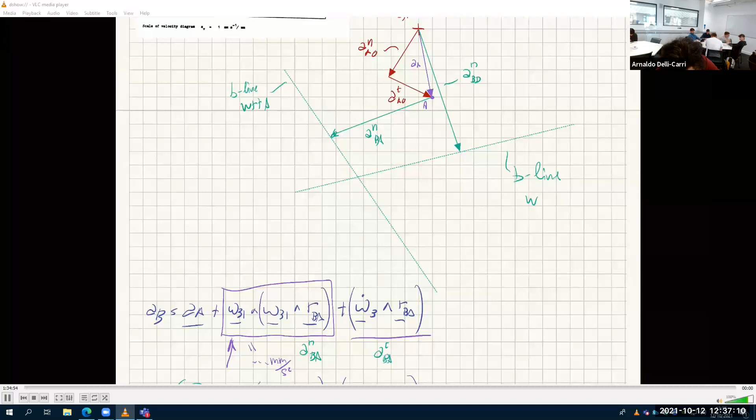Okay, so this one is, of course, the B line with respect to D, and so that means this one is point B.

So finally, we say that the acceleration of B, which is this vector here, let me do this in orange, the acceleration of B, which goes from O to B, this vector AB, is the acceleration of A, this vector, plus the centripetal acceleration of B with respect to A, plus the tangential acceleration, that means this one is the vector I'm looking for. This one is the tangential acceleration BA.

Or it can also be written as the acceleration of D, which means starts from here, plus the normal acceleration of B with respect to D, plus the tangential acceleration of B with respect to D. So I'm looking at this vector here. This one is ATBD. That's it, that's how you do it.

Again, it's just one step more complicated than the velocities because you have one more vector. Every acceleration has 3 terms instead of 2. So it's always the same thing. You have to learn how to do these things.

Now, the last thing we have to do here is find omega 3 dot, omega 4 dot, because that's what's missing. Let's look. Omega 3 1 dot is here, inside ATBA. So once that ATBA is given, we found it, we found this vector.

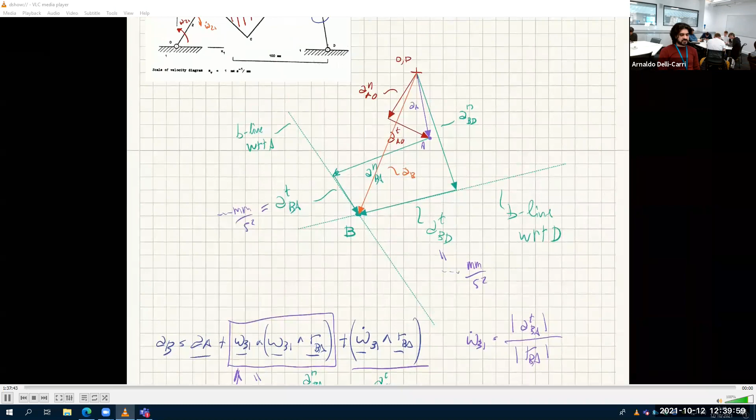No? If not, I'll do the velocity, the acceleration diagram of this other one very briefly in the same way, this one. And then we can go.

Okay, now at the exam, I don't think you will be asked to draw both diagrams. They probably ask you for one diagram. So if they give you the structure, the mechanism, which is a simpler one, they can ask you the velocity diagram. If they ask you for the acceleration diagram, it means you are given the velocity diagram. So given a velocity diagram, find the acceleration diagram.

But given a velocity diagram means you also have to spend some time finding all the omegas, because the omegas might not be given. How do you find omegas? Remember, it's always the VBA, VCA, VBD, all those contain the omega. You can always look at the equation, that's the idea.

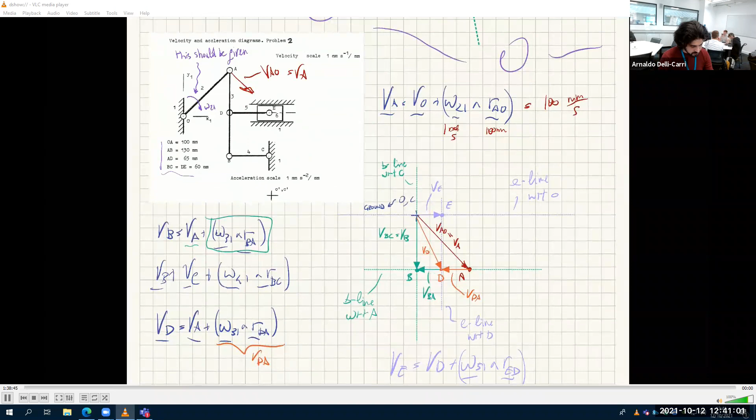So let me copy this again and paste this again. You know what, instead let me see if I can show you the solutions on Aula, which are already on Aula anyway. So we can go over them for 10 minutes.

50, 35, so many modules. Is there a way to remove them? No, there is no way, unfortunately. See, if there was a way, I would have used it.

All right, let's go here, which is week 5 tutorial. We have the solutions, see? Oh, this is drawn to scale. That's what we are expecting you to do. So let's have a look.

We have omega 1 in this direction, but that means VAO is perpendicular to AO and going in this direction. This is also full information because AO is given, so this vector here you can draw very easily. You start from OA, this vector here is given.

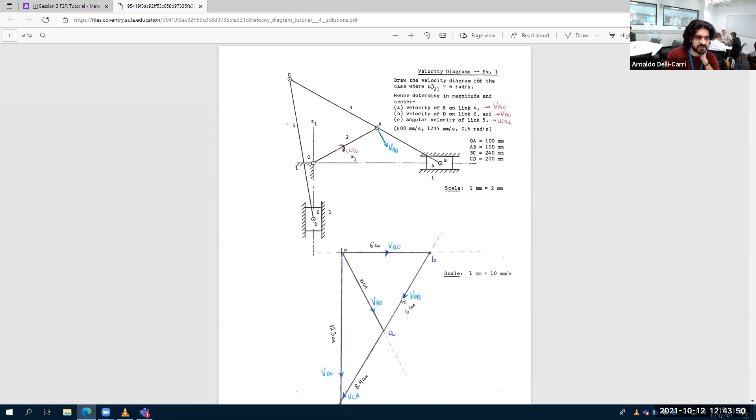So you know that from O to B you have VB, also called VBO, it's the same thing. And from B to A you have VAB, well in this case you have VBA in the opposite direction. So the velocity of A plus VBA gives VB.

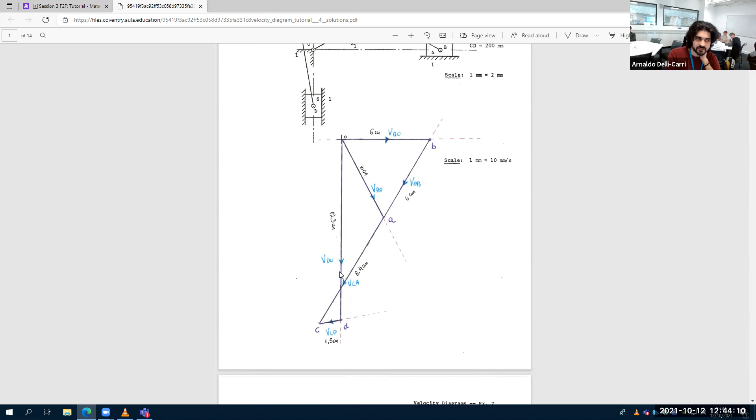And then you do the same for C, and the same for D. Of course D is vertical, so it's a vertical line passing through O. And there you go. So D is 12.3 centimeters long, but since you have a scale factor of 1 to 10, 12.3 centimeters are 1230 millimeters per second. That's how you use the scale factor.

That's it. Now this is an equilateral triangle, very nice. And these are the equations. I mean it's just the same thing that we've done all together, but this is drawn on paper using a set square and the scale factor, which was advertised on the paper.